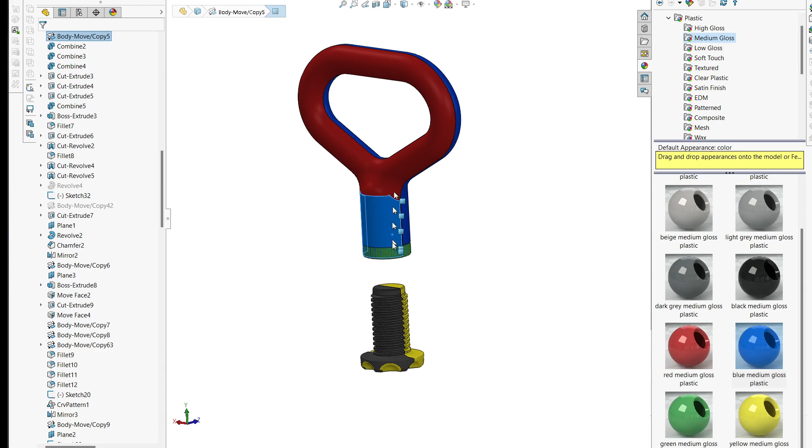This is an old version I made months ago and I've been using it a little bit. That is the existing kettlebell. I put a little hockey tape here. It didn't come out perfect, but it came out functional.

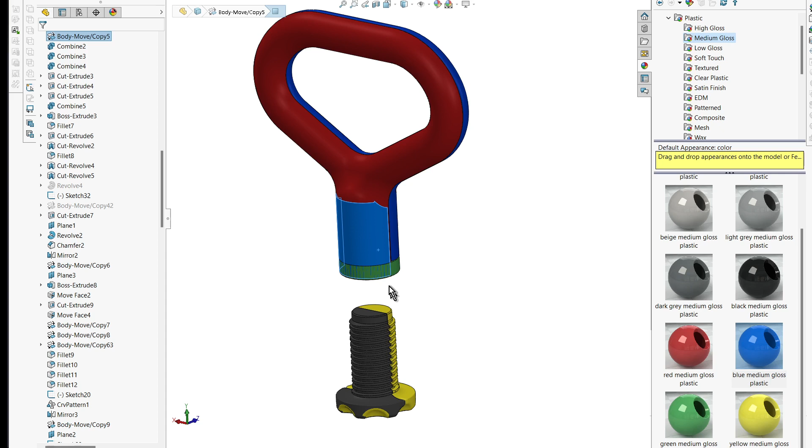Sticking with all these threads, I actually made it a little shorter, but it takes a bit to screw and unscrew the threads. I also kind of wish I did it the other way, so I could put this on the ground, put the weights on it, and then twist the handle on, rather than holding the handle upside down, putting the weights on, and then screwing it in too much. So I got tired of doing that and decided to make a new improved version.

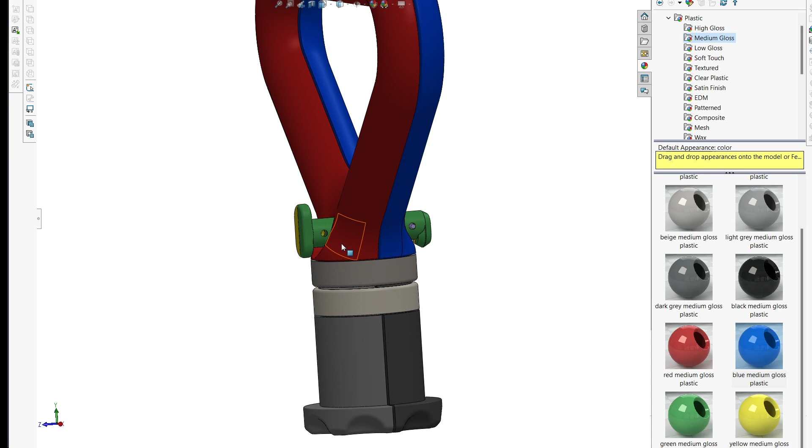So this is the new improved version. I have this pin, and the pin is very primitive. I could make it better, but it's just a kettlebell - it doesn't need to be super secure.

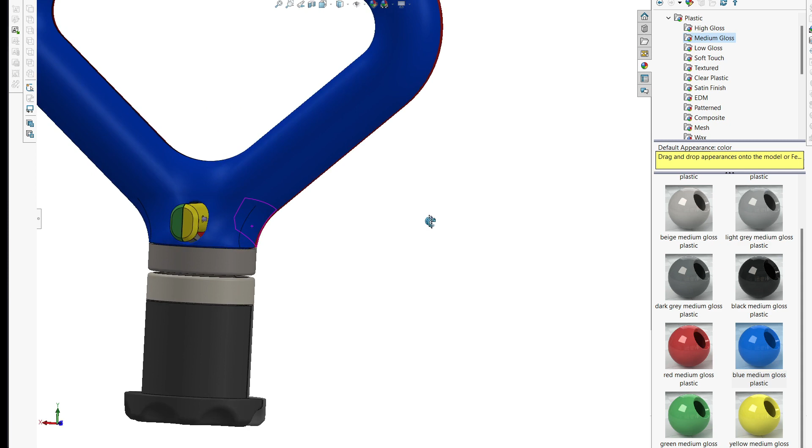I made the slot here, the hole, sort of oval shaped. If I hide this, you can see it's sort of oval shaped - don't mind some of those artifacts in there. So it'll just kind of slide in and then drop down, and it'll be enough to hold it in place.

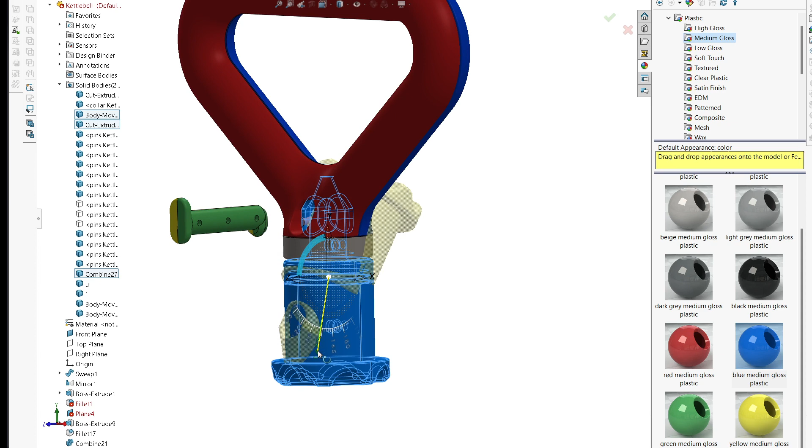If I move these guys out - I just started the print like 10-15 minutes ago. So you pull that pin out, and that would allow the bottom to drop out. Whoa, not trying to rotate it. That would allow the bottom to drop out.

As you can see there, don't mind these pins - these are just sort of for subtraction geometrically.

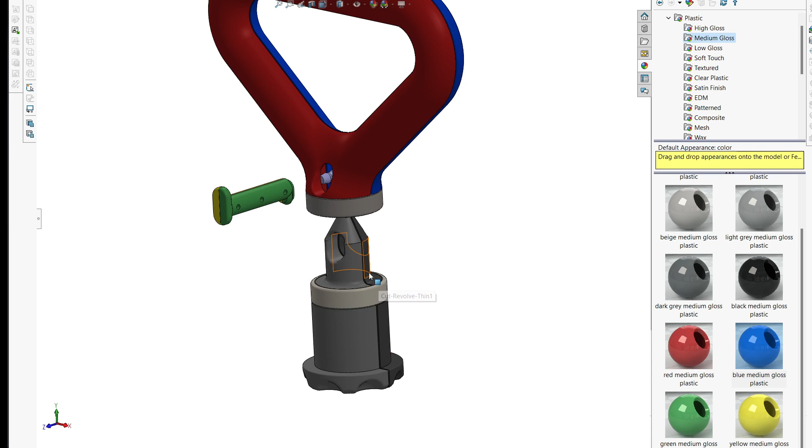So basically, I'll put this on the floor, drop some weights on it, then drop the handle on, then push the pin through, and the pin should drop down and not fall out. Like I say, it's not a critical pin application here.

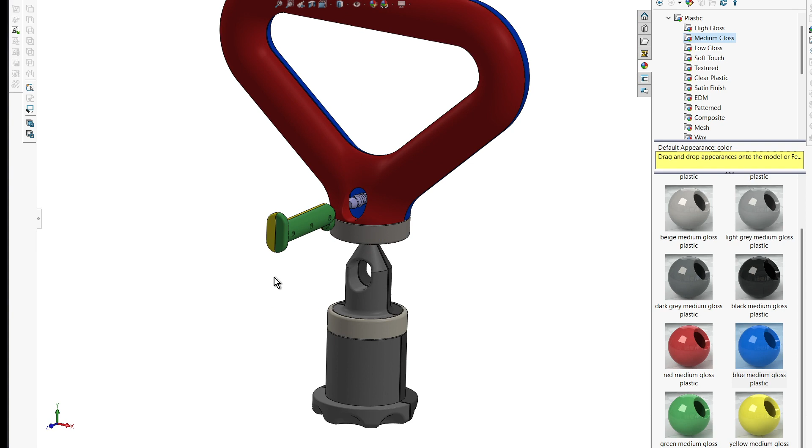So anyway, let's undo that, and then that. Undo those. Undo that. All right, now I guess if I just go like this. I should have kept that.

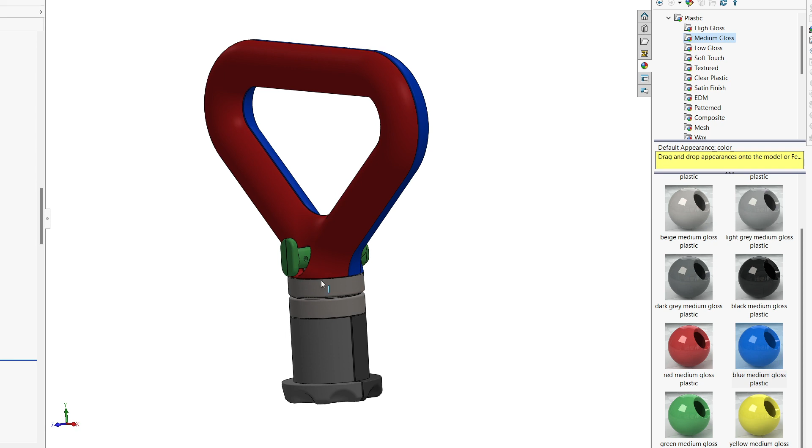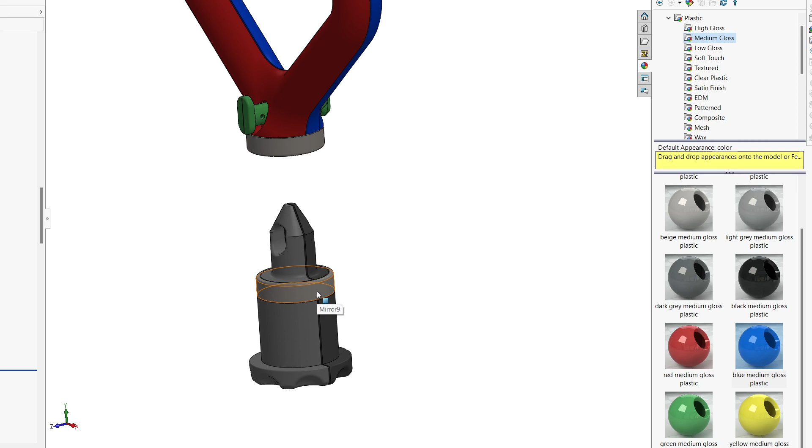I'm just going to show how this is constructed. So this is 3 pieces - well, actually it's more than 3 pieces because there's a pin in there, but I didn't move the pins down. That's not very visible in black - so these 2 holes there.

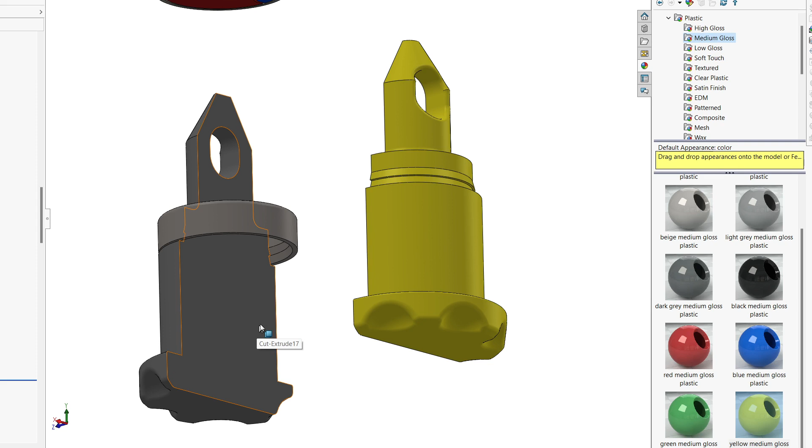I hope those made it. I think I probably just messed that up. Did I? Let's see, I have to check this guy. Nice, I have the holes in here.

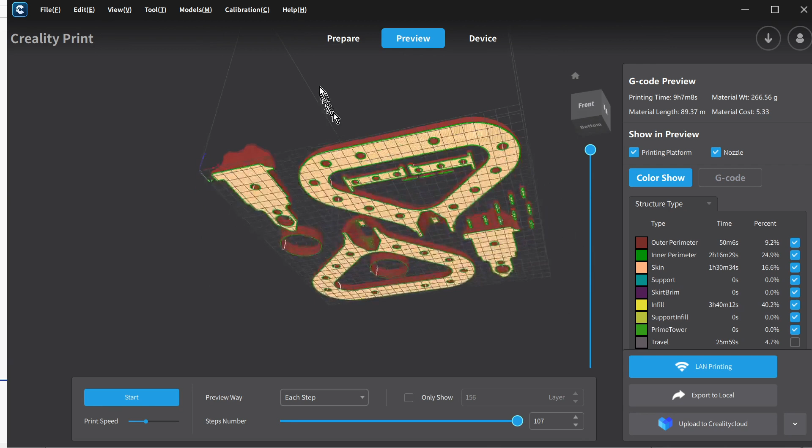So I messed up the SolidWorks model, obviously. So this is obviously sliced - this is all the parts.

So you can see here, this is actually a good visual - the handle is in 2 halves for better printing. I didn't put a support in here; I think it'll probably be okay.

I realized later that on the last one I did put a support in manually, and of course that printed okay. But I was also printing threads on that one, and this is not threads, it's just a slip fit, so I think it'll probably be fine.

I guess we'll find out, and I can trim stuff out if I need to. Printing in PLA - the other thing about this orientation is all of the layer lines, all the loads will be against the grain as opposed to pulling the layers apart.

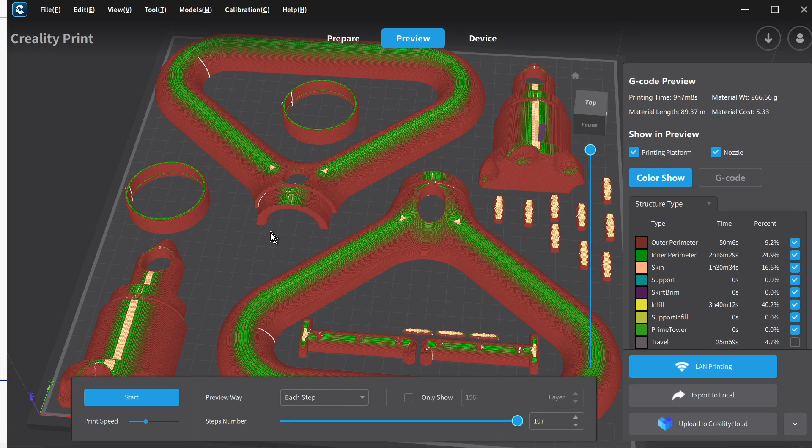Had I just printed this piece, like this piece and this piece, I could have printed that standing straight up as one piece, but then the layer lines would have been perpendicular to the force of gravity, which would let the weakness of the interlayer adhesion of PLA probably pull it apart over time.

Whereas I have them laying down so that when I put them together, the layer lines will be in tension, and on this part it's really only critical right here and right here. But that'll be pretty thick - I think I did 4 shell walls, so it should be pretty strong.

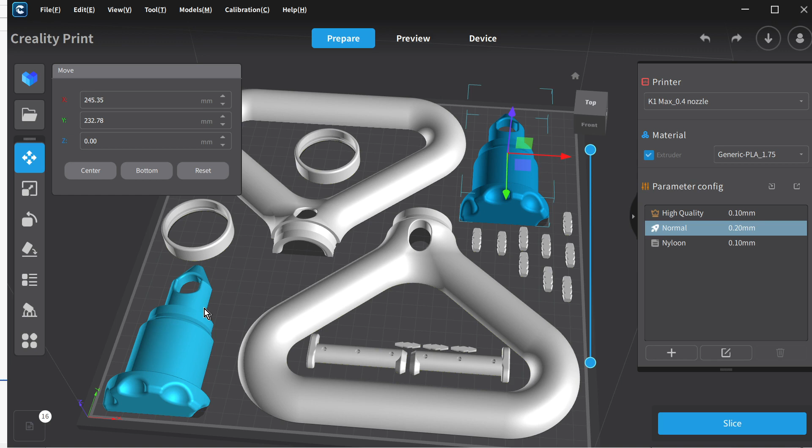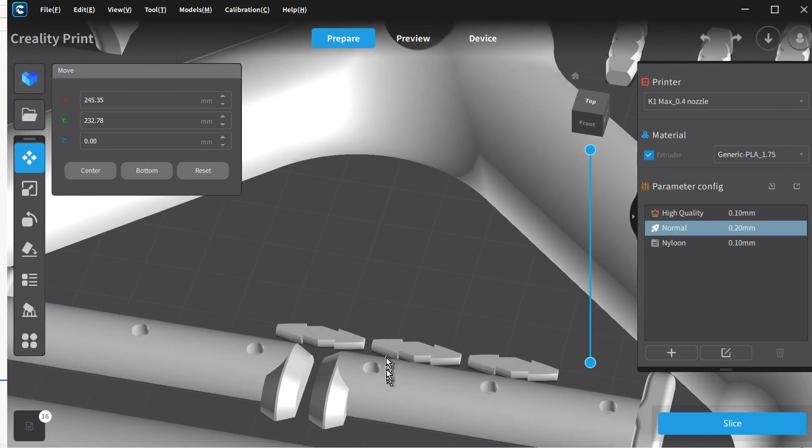So anyway, these two go together, and you can see there are holes for pins, and that's what these pins are. The shape of these pins is sort of barbed, and the holes are sort of barbed, with a bit of clearance, but they should snap together pretty well. Similarly with this, these are different, a little smaller pins, but very similar - same thing, barbed holes, little clearance, and they should snap in pretty well.

And then these collars, one goes on here, holding these two together, and this collar holds this together. So those should hold together pretty well without any welding or glue. These ones should snap in. If they don't, I can also melt them in.

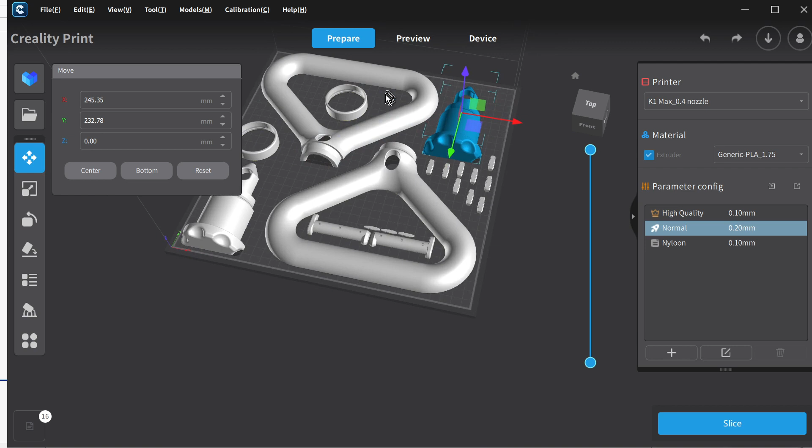There's not a collar on this holding it together like on the big ones, but I think it'll probably be fine. I'm not afraid to use my soldering iron a little bit to weld things together, or even a 3D pen if needed, but that's a little slower than the soldering iron. You can do the soldering iron sort of TIG style with filler plastic, I should say.

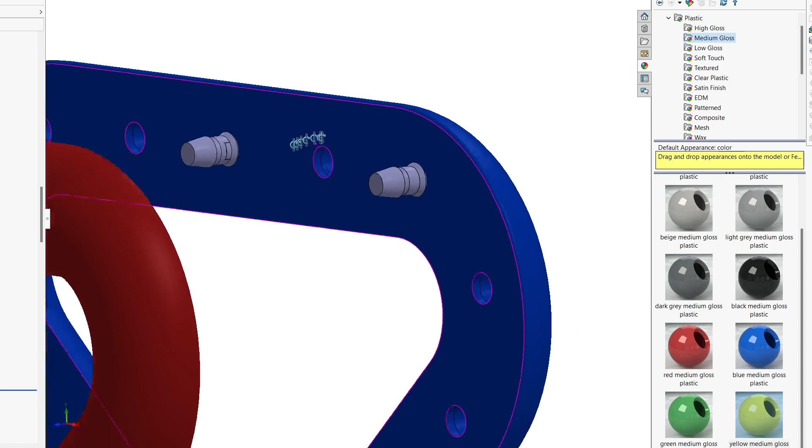So let me go back to here. You could already see it in the sliced version. Let me just pull this apart here so you can see. I only show a couple pins here, but you get the basic idea. I have extra holes here, just in case I want to use more, I can. If I don't, I don't.

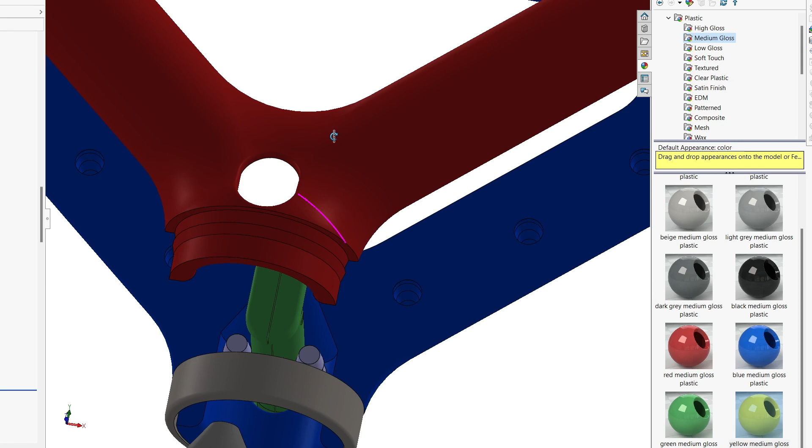Again, here, the weak point will be sort of this cross section area, but it should be fine. Interestingly, looking at this now, being round on round, it'll be sort of pushing this apart, and the layer lines could be working against me there a little bit. Pretty sure it's going to be fine, but not for overhead lifting — don't do military presses over your head with this, because if it breaks, it's just going to be PLA.

I will probably put it for download on Cults 3D. I don't think I ended up putting the other one on Cults — I may have, I don't know. I didn't finish printing it properly. Actually, one half of that piece was sort of incomplete, but it was good enough, and I used it, and it works.

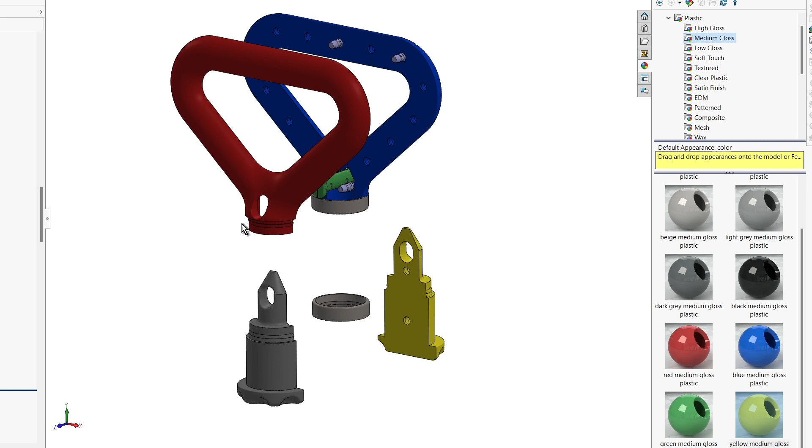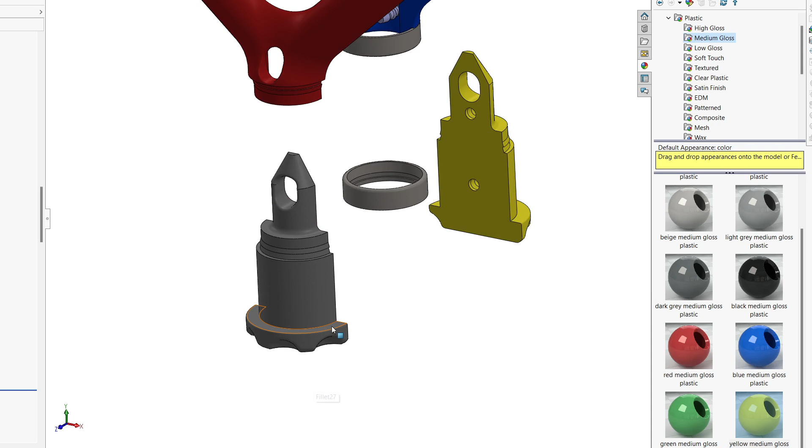But this one should be much quicker and more convenient to change the weight sizes. I also made this straight portion of the handle a little wider, and decreased this radius a little bit because my pinkies didn't fit in there well with both hands on it, but it should be fine. I might have lost a little height as far as how many weight plates I can fit, but it's going to be plenty. I'm not trying to go super heavy, it's just a quick thing. If I want a more robust one, I can make it a little taller quite easily. This should be good enough for now.

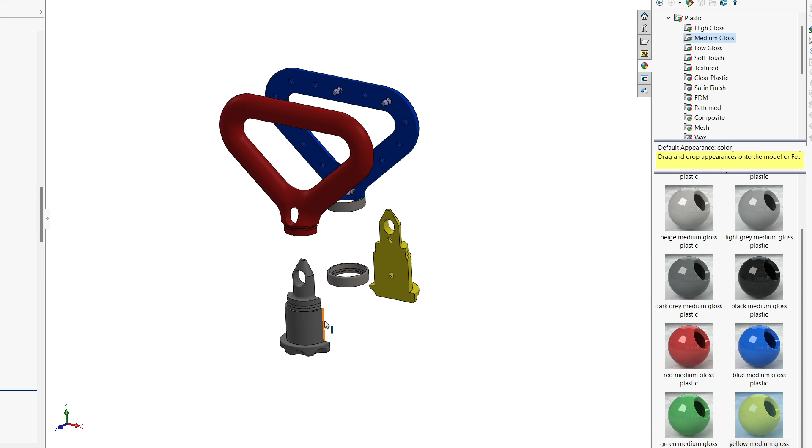So anyway, I will probably piece this together with some images of the print and maybe the final kettlebell. Probably won't do a workout video, not my thing. But anyway, thanks for watching, stay tuned, and we'll see what else I can come up with.

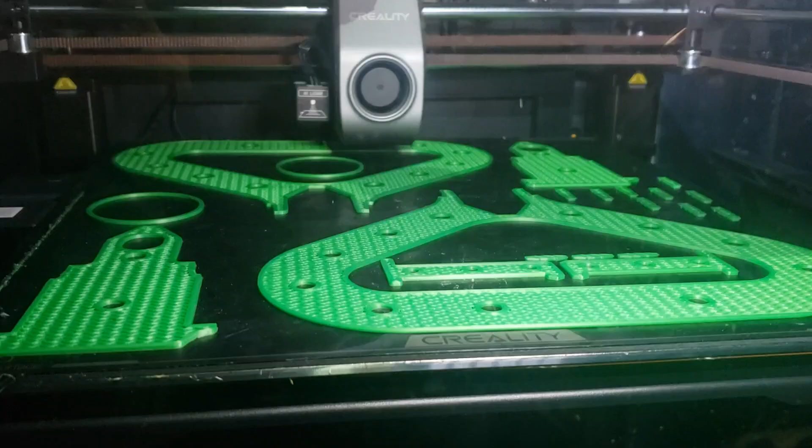Here we are checking up on my kettlebell handle print on my K1 Max. Looking good.

This material is... I was just going to look for the spool, it's on the back of the machine. It's some kind of PLA plus in green, almost like a silk, I don't know — I have so much filament I lost track. I just grabbed it, looked like a cool color.

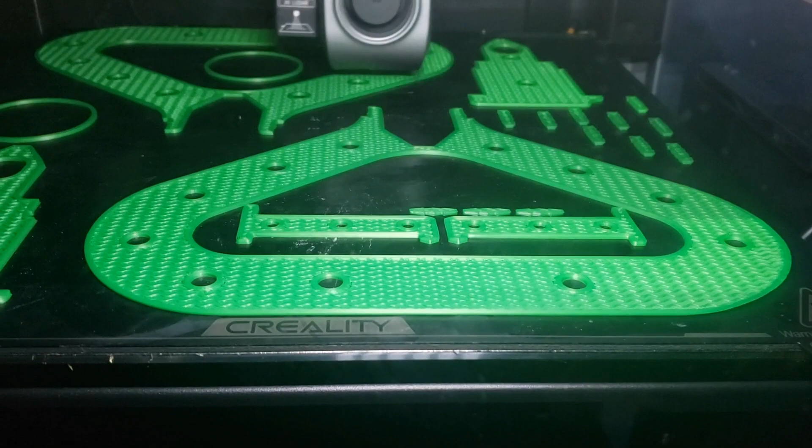Looking good. I intended to bring the existing kettlebell out and show that, but I forgot, so I will just show that next round if I remember. So there we go, stay tuned.

Just as I started to walk away, I realized it must have just got to whatever layer to go faster, because it cranked up the speed. This light is messing things up. There we go, definitely moving a little quicker now.

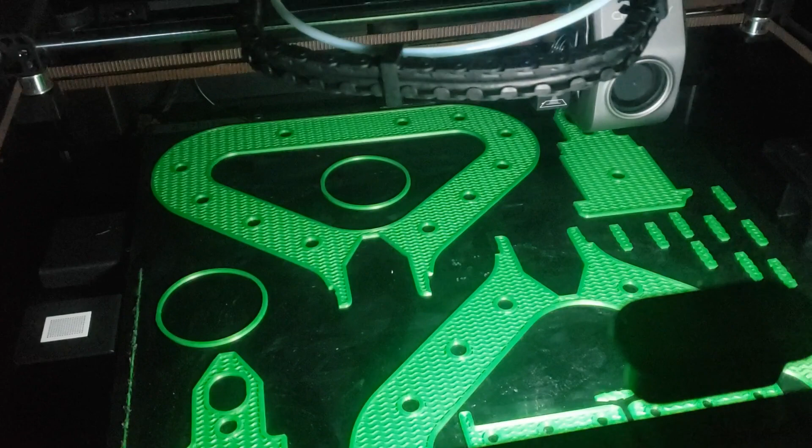It's funny, maybe it doesn't seem too quick now, but compared to my old printers back in the day, it was like a snail making lines. These things crank. Plus it's pretty heavy, pretty thick infill — I think I did 22%, and it's a gyroid infill.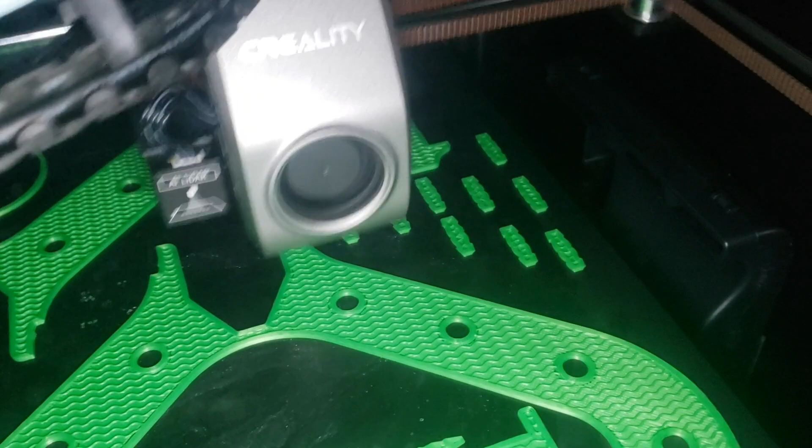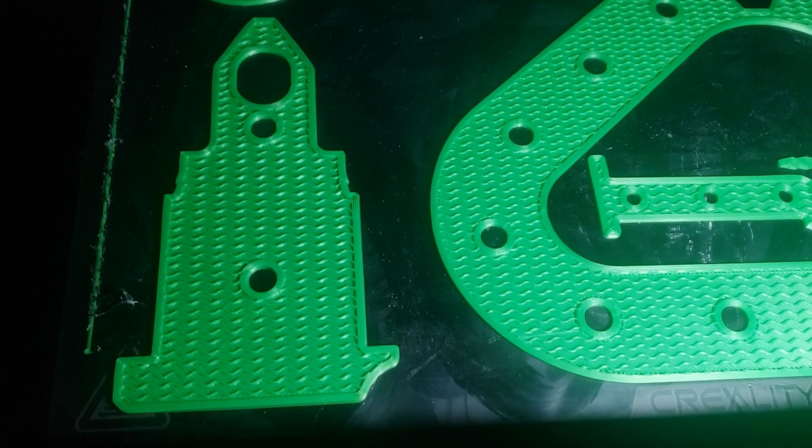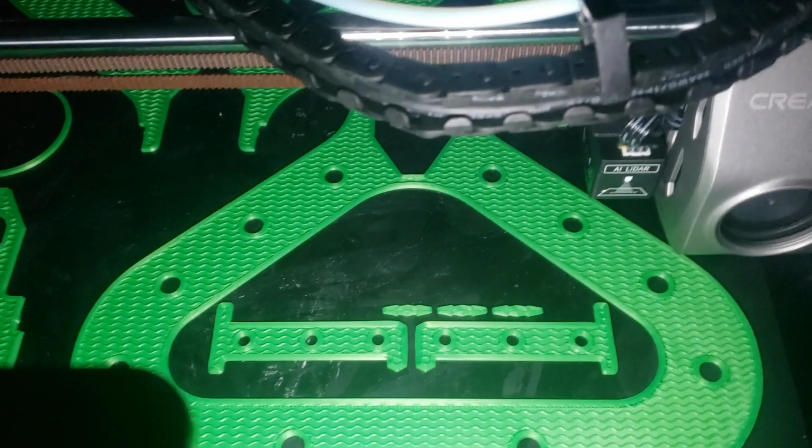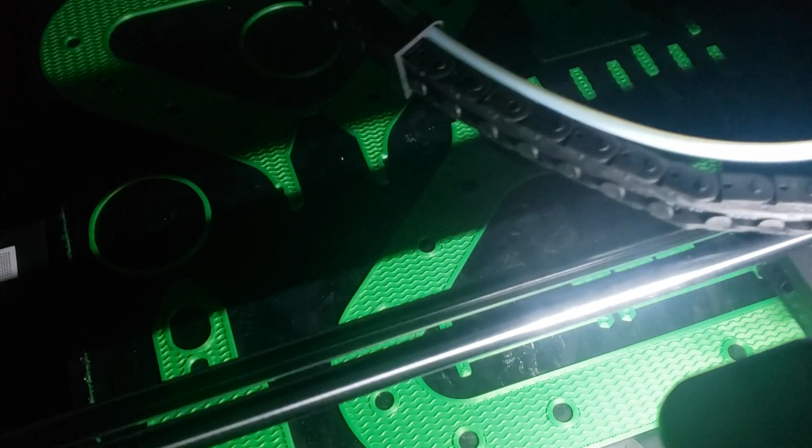I like the gyroid infill. I think it distributes the stresses along curves rather than triangles. Triangles tend to be more rigid, but curves tend to bend a bit more while not causing as much cracking, because they distribute the stresses along a longer length. A triangle does a great job of being stiff, but really the stress at the corners is really magnified. So you'll see on various trusses and things they'll triangulate, which is good practice, but if you can do arches and curves, that can be better if applied properly.

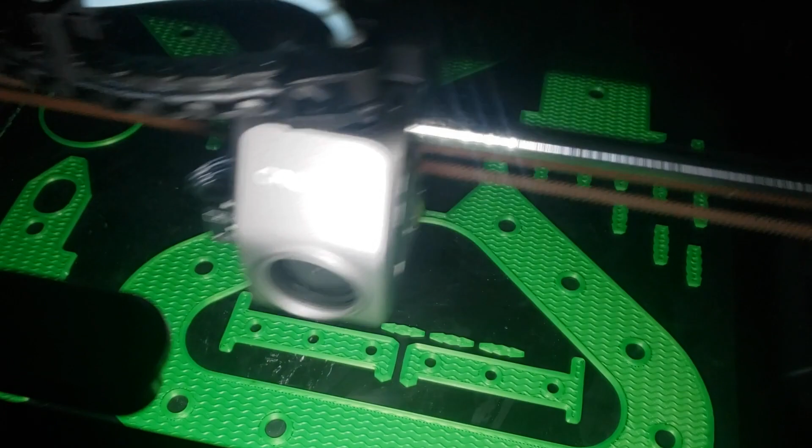In any case, enough for now. It's going to be a 9-hour print. I guess I'll get up in the morning and it'll probably be done.

All right, you ready for this? Bam, that is the existing kettlebell. Little hockey tape here — it didn't come out perfect, but it came out functional, so I didn't care too much. I was wondering how I was going to do this one-handed, but here we go. Easy to take it apart one-handed, I guess, just unthread that guy.

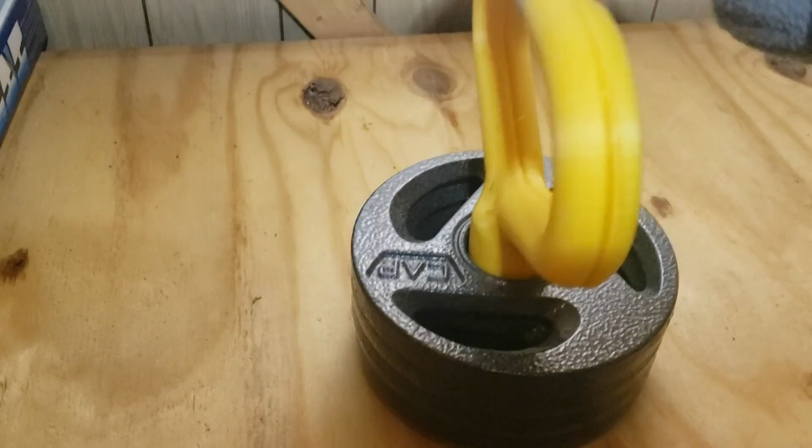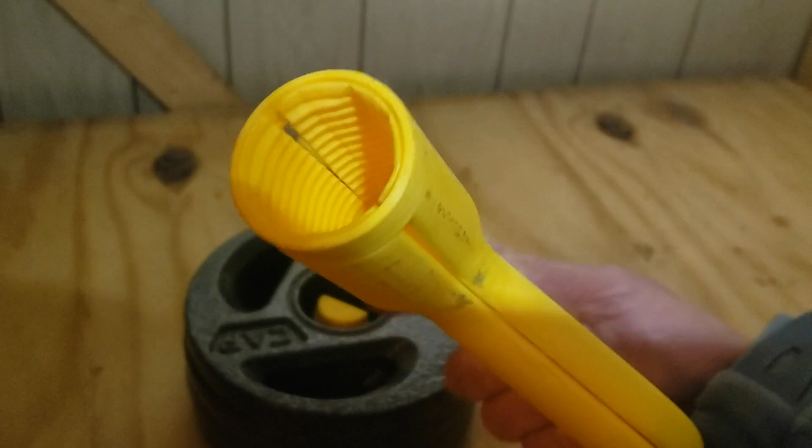All right, you can see the threads in there. They're sort of hexagonalized, just to make it print easier. I could have done the full threads, but it wouldn't have been entirely print friendly, so I decided to truncate the threads a little bit so it would print better.

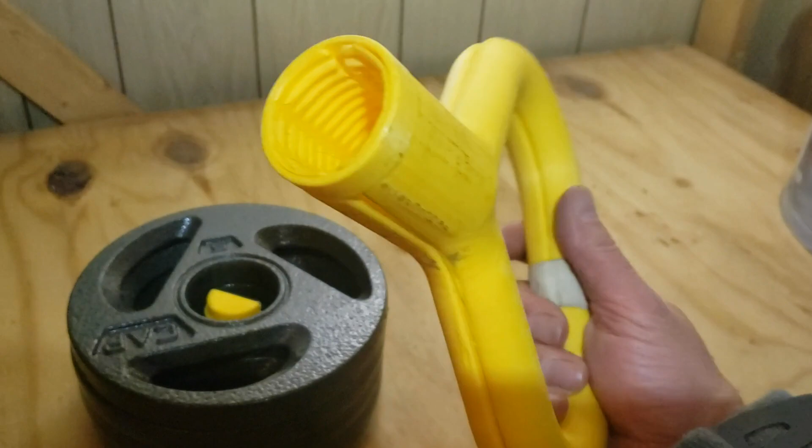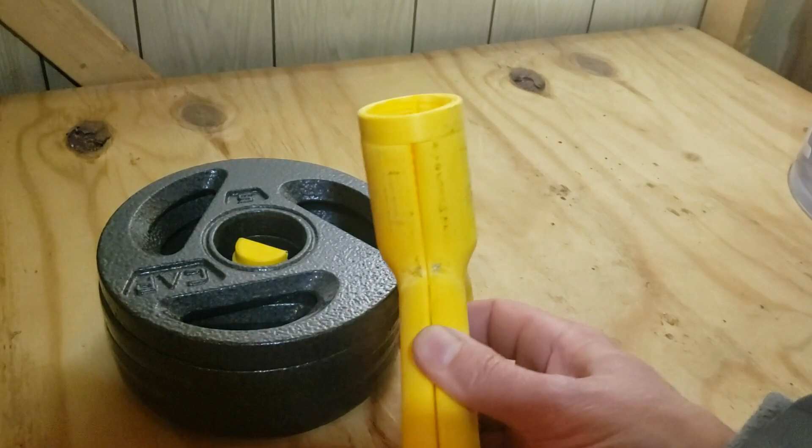And this one, oh, that's for it. Yeah, now that I think about it, it warped pretty good. So we'll see, this was printed on the K1, whereas the new one is printing on the K1 Max. I did not use a brim because I get annoyed pulling the brims off. So you can see that warped pretty good.

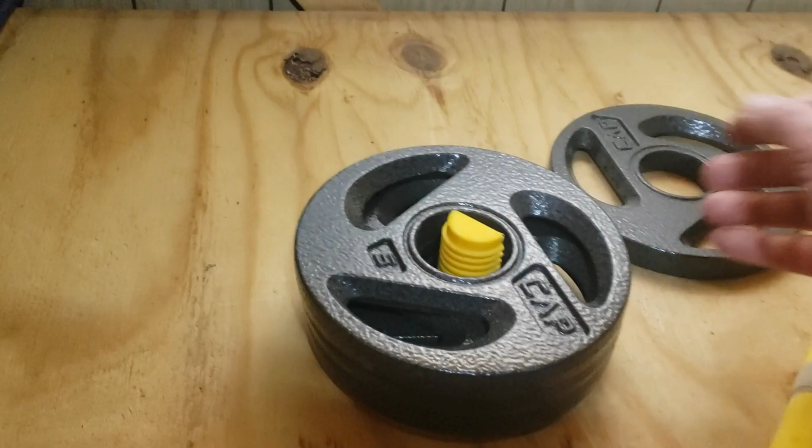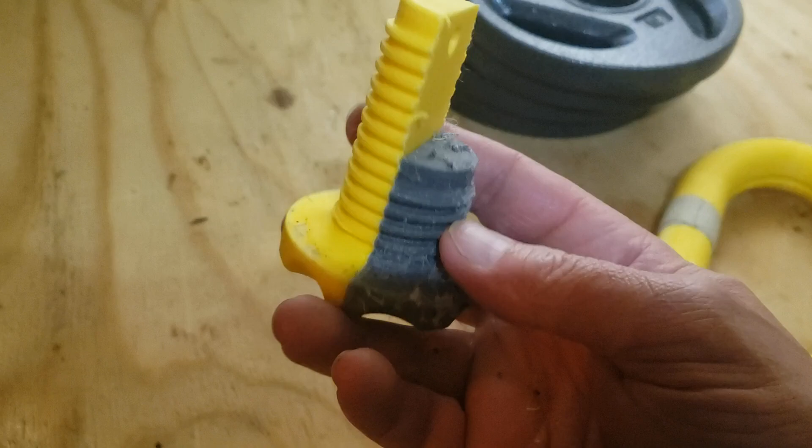So this piece was nylon, the gray one was actually nylon. Nylon was the first one I printed, and for some reason I'm not sure what happened - one of them was good, one was bad, so I reprinted it in PLA yellow, and went for further engagement. I don't remember, I'm trying to remember, this was quite a few months ago. Maybe the other piece warped or failed or something. But for some reason, I combined the shorter version of the nylon and the longer version of the PLA.

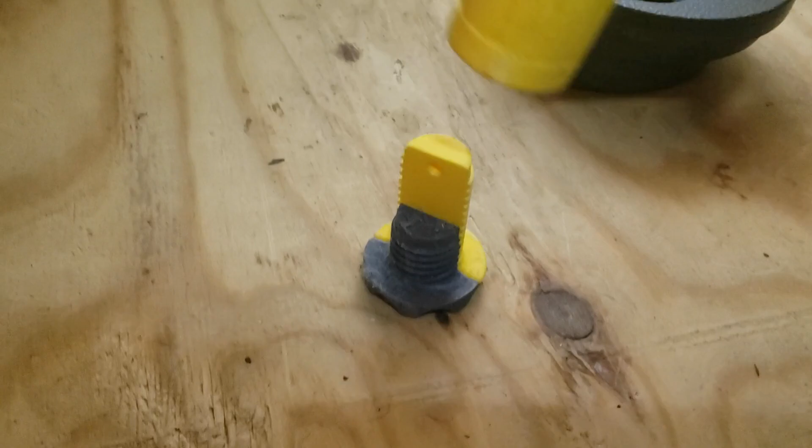But it ultimately works, and so that's the basic idea, but it's definitely more cumbersome. You got to thread it all the way in there, it's a really long thread. Whereas the new one, I figure I can do much easier, because this doesn't self-center, right? I guess I could put a shoulder at the bottom, but it still wouldn't self-center all of them.

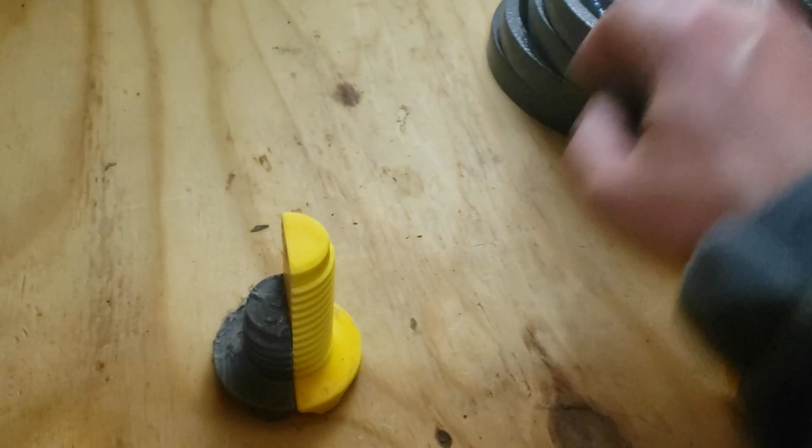So if I try to stack these weights on, and I could definitely - I mean this is 20 pounds, I got 10-pound plates, I got 25-pound plates, I can load this thing right up. Although with the PLA version, it's a little sketchy.

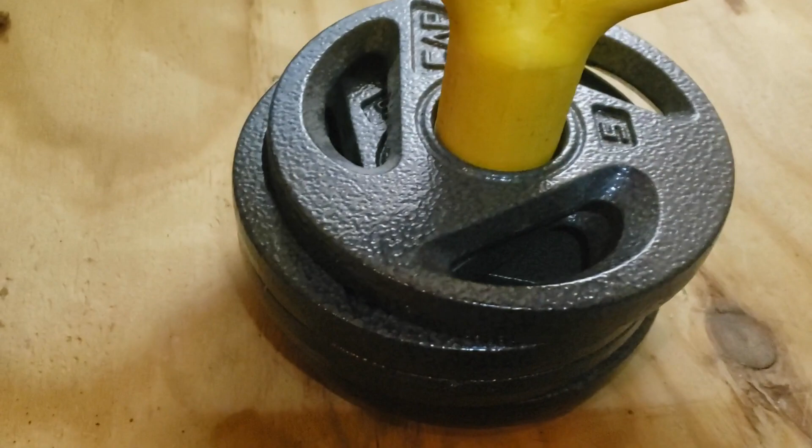So I mean, I guess I could do this, but let's see how easy it is to... I mean, maybe this is fine. Maybe I should have tried it this way in the first place, didn't even realize. Yeah, I guess that's all it takes. Huh, maybe I like this one better now.

Go figure, I never tried loading it that way. See what I get for trying one hand. Look at that thing, it's pretty heavy, that's 20 pounds. Well anyway, I have the new one coming, and maybe I will end up just using this one after all because that actually went really smoothly. I'm going to do that again just because it went so smoothly.

I just need less threads, I need the shorter height of the nylon version. But I figured with the PLA, I wanted plenty of thread engagement - that was until I had to unthread it. So if I jangle these around, I bet it's still pretty easy. That's actually really good, huh. Looks like what I originally did is okay. But I have a different version, and I guess I'll compare the two, and we'll see when that happens.

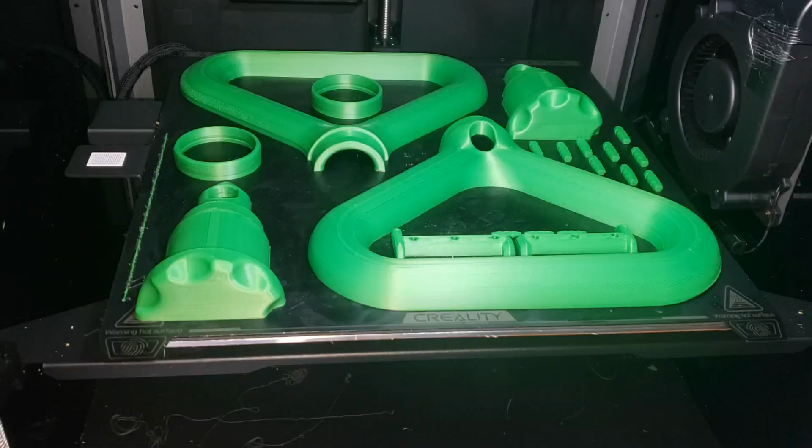All right, there is my completed prints of my, what do you call it, kettlebell handle. Version 2.

I'm just going to bring it in the house. Nice beautiful morning out here in formerly Arctic New England. I don't know, it's going to be at least 60 degrees out at 7 a.m. Anyway, be back in a minute.

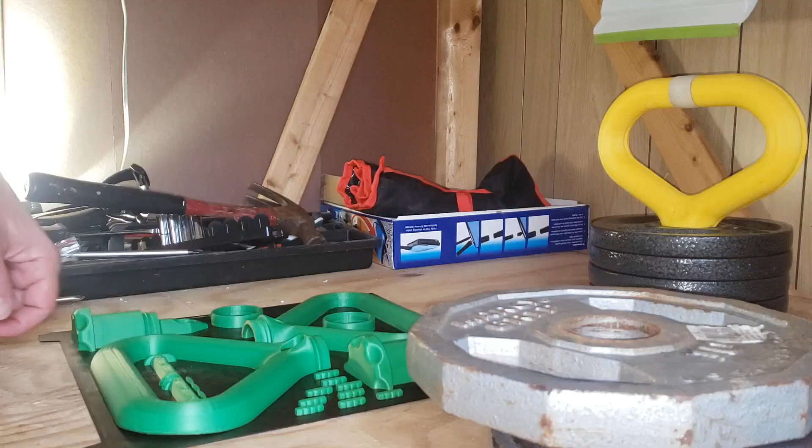All right, here we are. Here's my old version 1, version 2 kettlebell. If anybody's not familiar with - well, I guess anybody that's familiar with what 3D printing used to be, this would be no surprise.

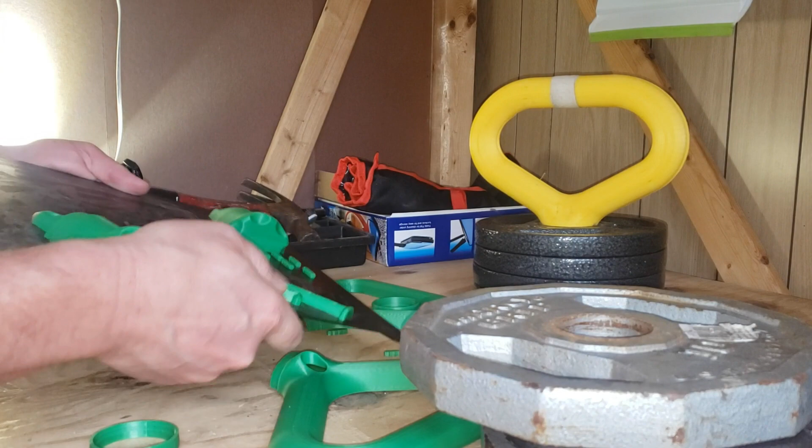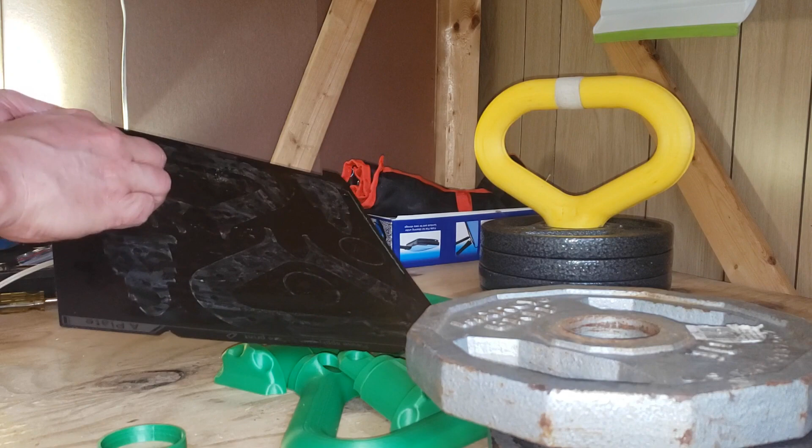The magnetic bed - back when I was a kid, just kidding, 5 years ago, oh, maybe a little more - oops, lost one. There weren't these, or at least these steel spring magnetized beds weren't really a thing.

But they were great. All right, so we get these guys, we get these pins, we'll see how they snap in. May or may not be a good fit. I probably went a little on the tight side.

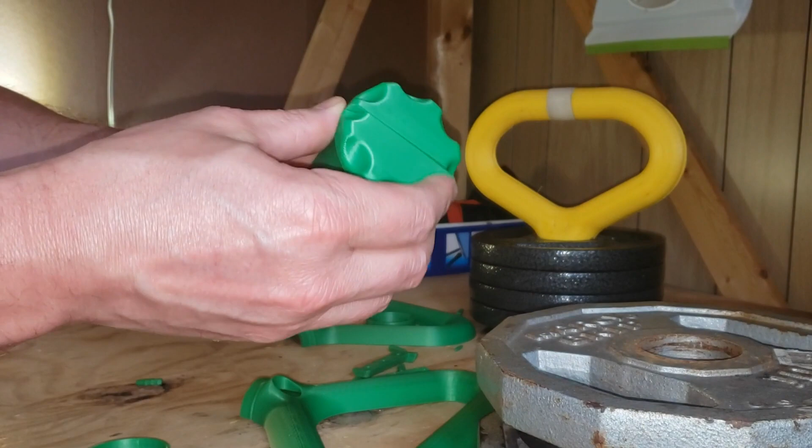Look at that, I just happened to have one of these persuaders. Nice. Persuader for the win. Look at that, a little wobbly, but staying together so far. Throw the collar on there. That could be tighter, but it shouldn't go anywhere.

Oh no, I thought I did the wrong size pin there. Did I do one of them wrong? No, here's the other pin, these are smaller pins for this guy. I only did 2 pins for some reason. Probably fine.

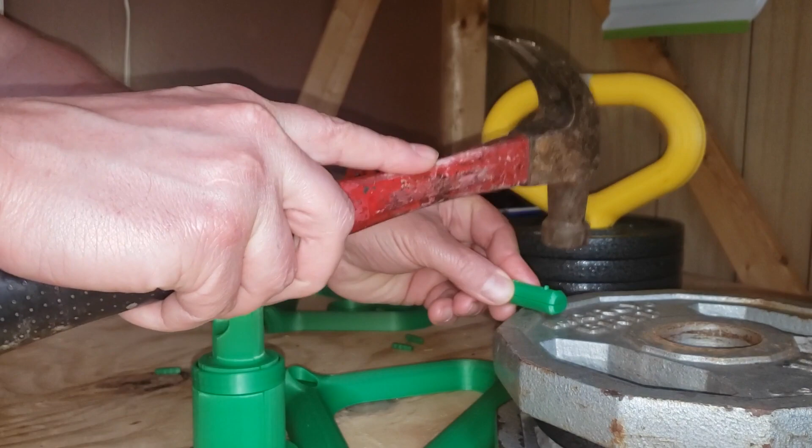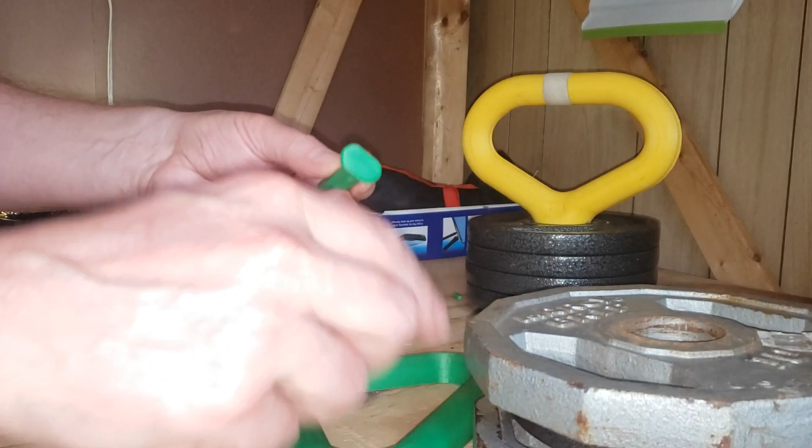This is a little off center. I kind of cheated with these. Actually, that may work out, that may help it stay. They're a little long, that's fine, probably help it stay together better. But that's actually more secure than the other one.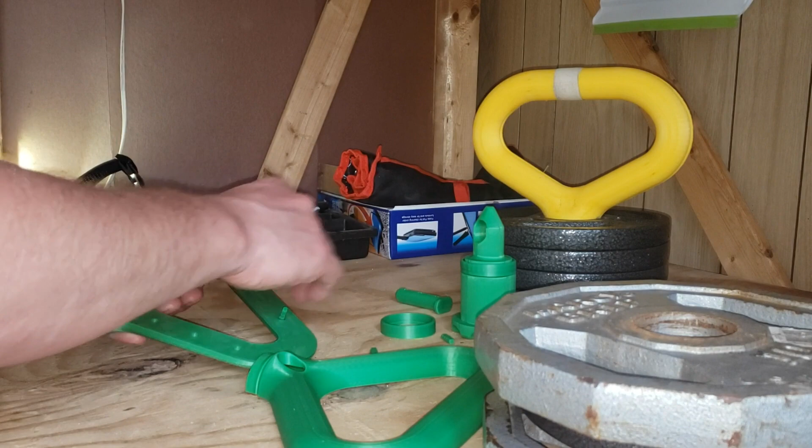So we got that guy, we got that guy. Let's throw the handle together here. I don't need all the pins, but I figure the more I do, the more secure it's going to be. There we go, seems like a good number of pins. I don't think those will line up if I don't do the initial persuasion.

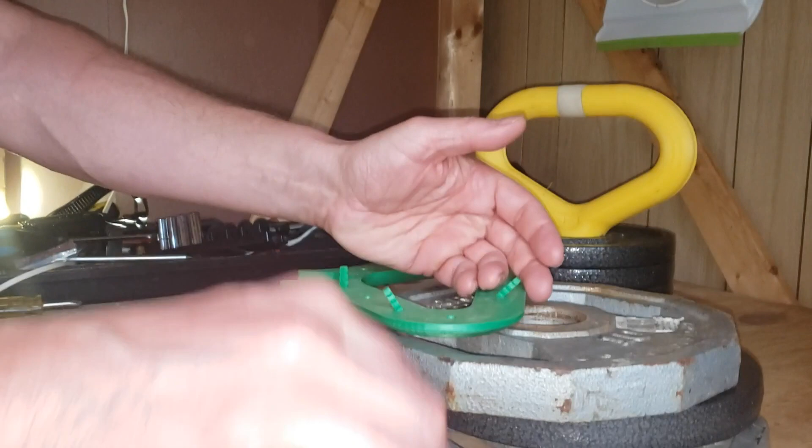All right then. I'll just smash my fingers instead. There we go. Crisis averted.

Don't try this at home. I definitely recommend not hitting your pinky finger with a hammer. But sometimes you got to do what you got to do. Fantastic.

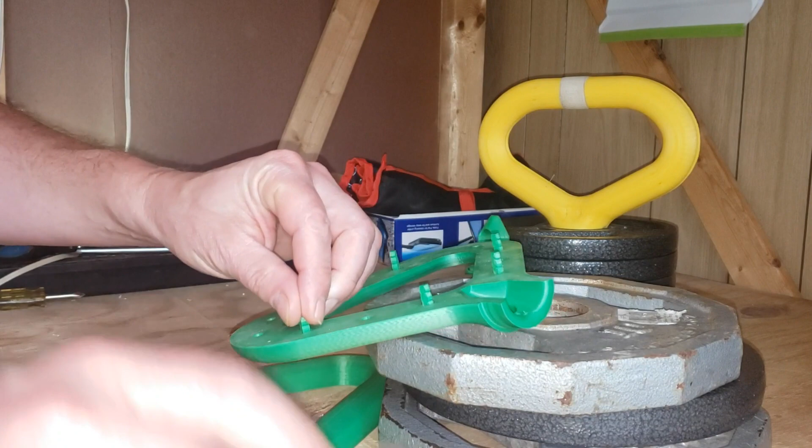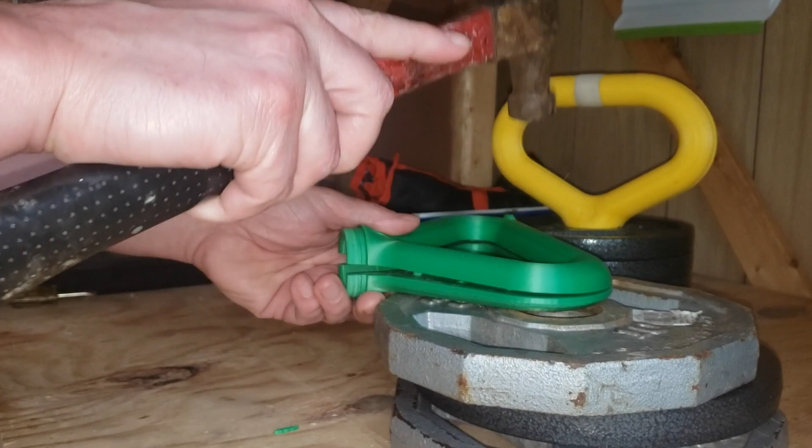So I was at a family gathering recently. This color sort of reminded me of this. And we were having tacos, and somebody said we have avocado for the tacos. And I said, avocado, don't mind if I do. And everybody said it wasn't funny while they laughed uncontrollably. They said they were laughing at me. I said, does it really matter? And it became the joke of the night. So try it on your people. Or, avocado don't really care if you don't. Or, you know what, that was a perfect opportunity, I should have said avocado don't care if you avocado don't.

I'm going to call this avocado green. Looks like we get a little bit of warpage there, but that's fine. Nothing a little hockey tape won't fix, which is why I did that one in the first place. Which might have clued me that it was a possibility to happen again.

Evidently these pins, I wonder if I didn't make these pins short enough for the holes, or vice versa. Those don't want to go tighter than that. But this thing, I'm calling this joined. So this retainer collar on here. Pretty good, a little looser than I would have preferred, but it snapped on. So it's kind of falling off, but I think it's going to be fine.

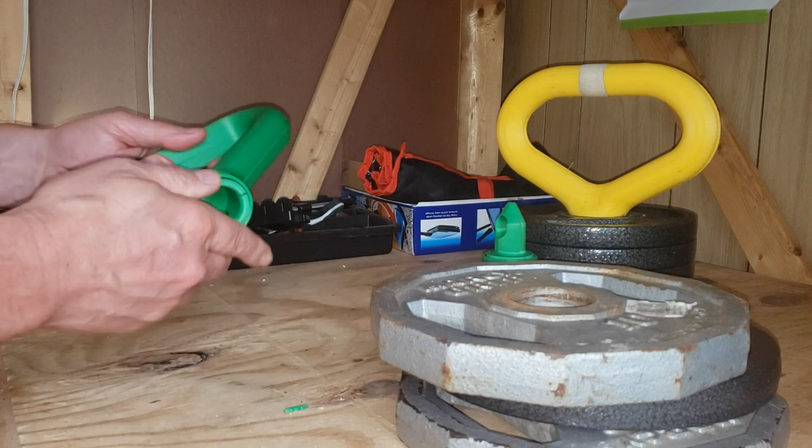All right, let's give it a test.

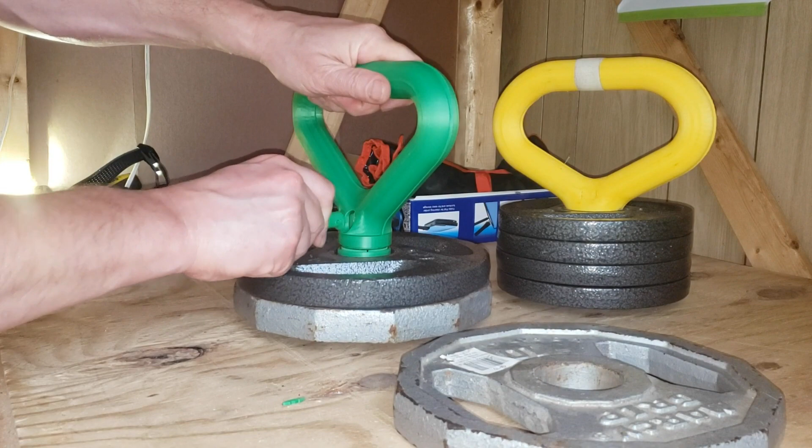And the pin doesn't go in. Why? Oh, I gotta line it up properly. Goof, gotta line it up with the hole, you know. Still doesn't want to go. Went part way in.

Did I make the shoulder too tall? Is it these too wide? Looks like these pins are a little bit proud. Let's persuade that a little better. Oops, I persuaded that a little extra. This might be just enough to do the trick, though. Oops. Avocado, don't do this at home.

Nice, look at that, kettlebell. Does this come out easy? Oh, that's so much easier than the old way of twisting this thing all the way off. I mean, it works. I'm sure it's stronger, but I mean, this is 20 pounds.

Apart now, maybe. After that abuse, that part seems to be unscathed, that part seems to be unscathed, and this part I over-persuaded it with the persuader a little bit, but where the stresses were from me abusing it there, seemed to be fine.

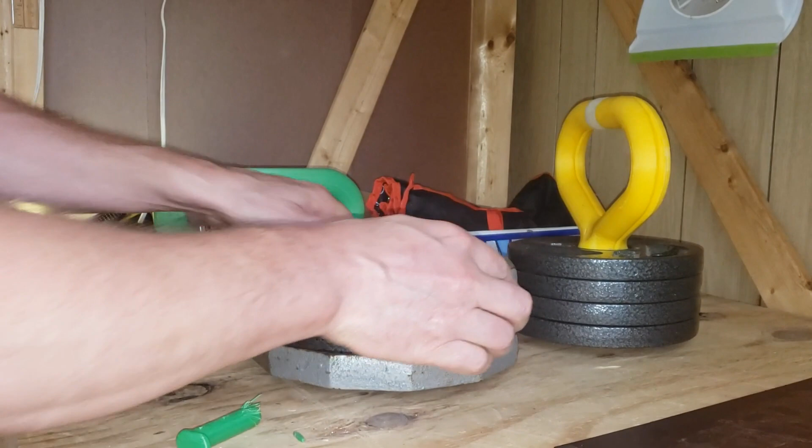Let's try a third plate. Uh-oh. Yep. So I should have made it taller. That's what Kevin Hart's mother said.

But what are you going to do? I guess it's just an excuse to make another one. And maybe I'll put a brim on these guys so it doesn't warp. Or maybe a raft, maybe a raft would do that.

I mean, I could probably put, I know I could put a 25 on here. I might even be able to put two 25s. I would like to be able to put like a 45 on there for 20. I mean, I could do another 5 for 25. At 25.

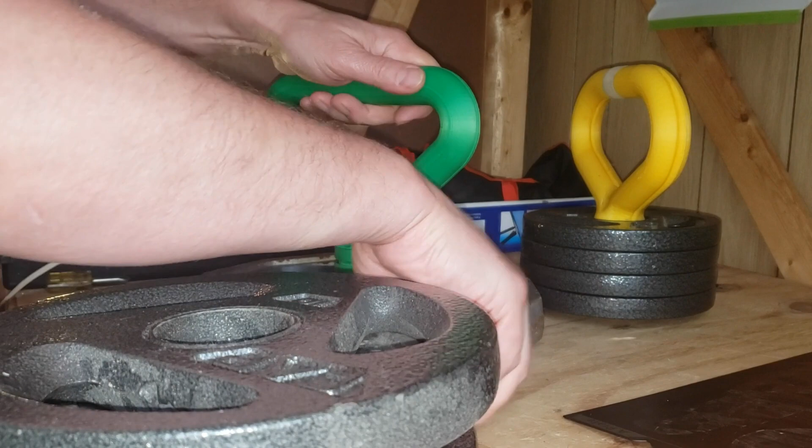That's not a 25. But this is. So obviously, I mean, I know I had 20 on there, not 30. I was going to say I had 30 on there, but I mean, so far. Oops.

Let's see if I can get another 25 on that. It's kind of early for lifting weights, but unfortunately, that's what I'm supposed to do. two 25s, don't... oh, look, you know, there you go.

I mean, that's 50 pounds. Looks like it works to me, if I really needed to do 50 pounds. So, we'll call that a win.